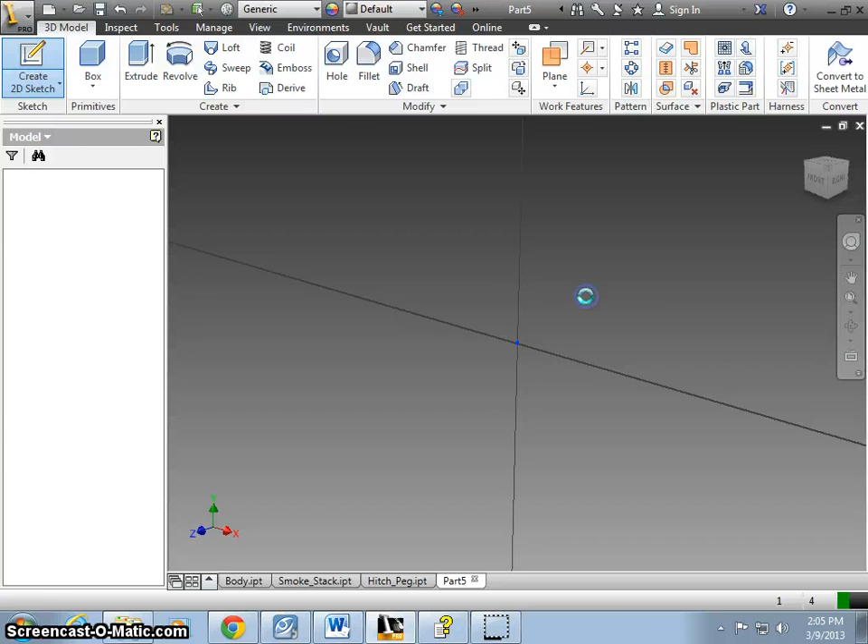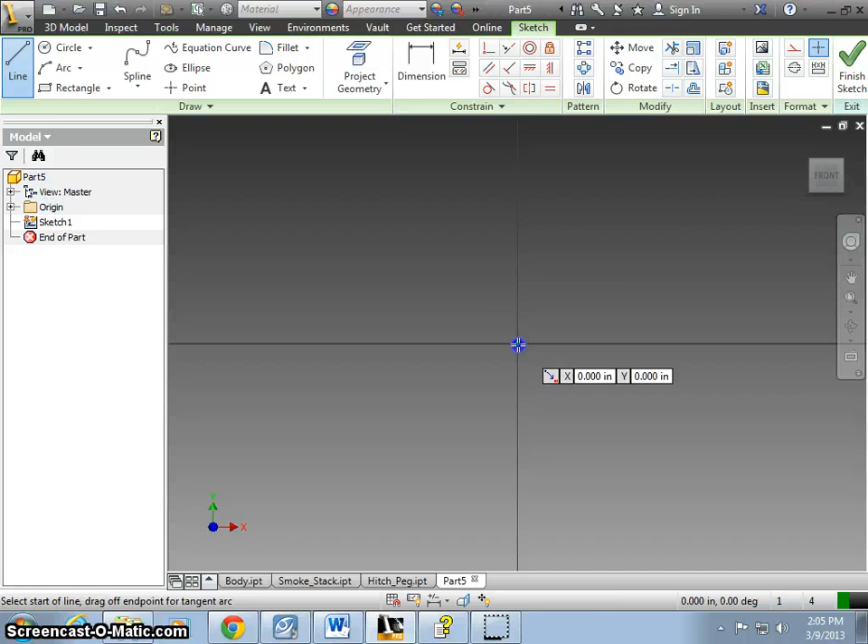So again, I'm just going to create a new sketch and sketch that out here. Now before I start, what I want to mention is notice how there's that hole in here, and same thing, you can either draw this as a full part and then drill the hole later, or just draw it in there right now. So what I'm going to do is draw it in there right now, and this center line that I'll be drawing is just going to be the axis, so I have something to revolve around.

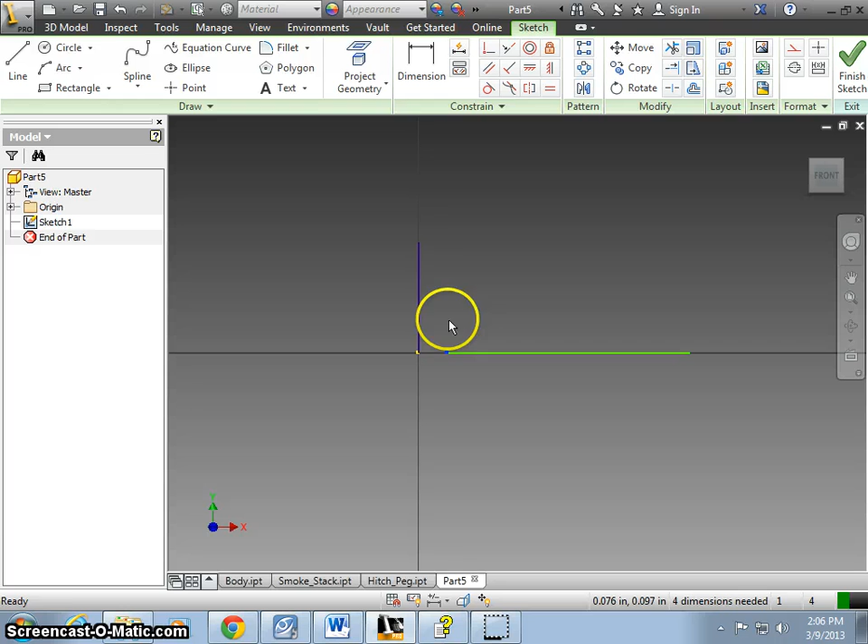Okay, so I'm just going to place that there. That's going to be the very center of my axle hole, and from here I can just go ahead and start sketching that out. If you notice that I just drew this bottom line here, I'm going to wait to draw the arc for that round over, and then for these parts here I'm just going to draw them with 90 degrees and worry about the fillets later. Okay, so here all I'm doing is going up, line, give the thickness, get the overall shape, and then I can worry about dimensioning it.

Okay, so I know from the center of my wheel to the end point, or the center mark of that radius, is 1 inch. So I'm going to dimension from, again, the center line to the axis to the end point of that line that I drew. That's 1 inch. Okay, that scales everything up, gives me the thickness of 1/4 of an inch. So I'm going to dimension that as well. 0.25. And if this ends up happening where it actually bumps that down, you can either leave it.

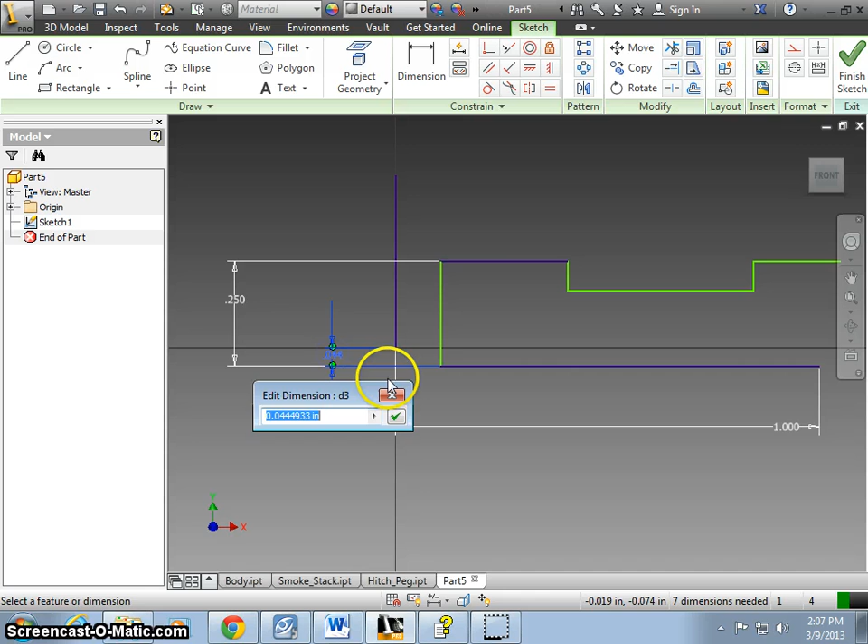I'm actually going to adjust that just because it's a pet peeve. So I dimension from the end point of my origin to the end point of this line. I'm just going to change that to 0. Okay, so that locks in that line there. Again, adjusting the thickness, 1/4 of an inch. And the thickness of this thin section right here is 1/8 inch, or 0.125.

Okay. Here I can start dimensioning where those line changes take place, or lengthwise. Okay, so I have 1/4 inch and 3/4 of an inch. So again, that's based off the center line. So from the center line here, it's 1/4 of an inch. From the center line to that next, I guess, step up was 0.75. So I'm going to dimension that there.

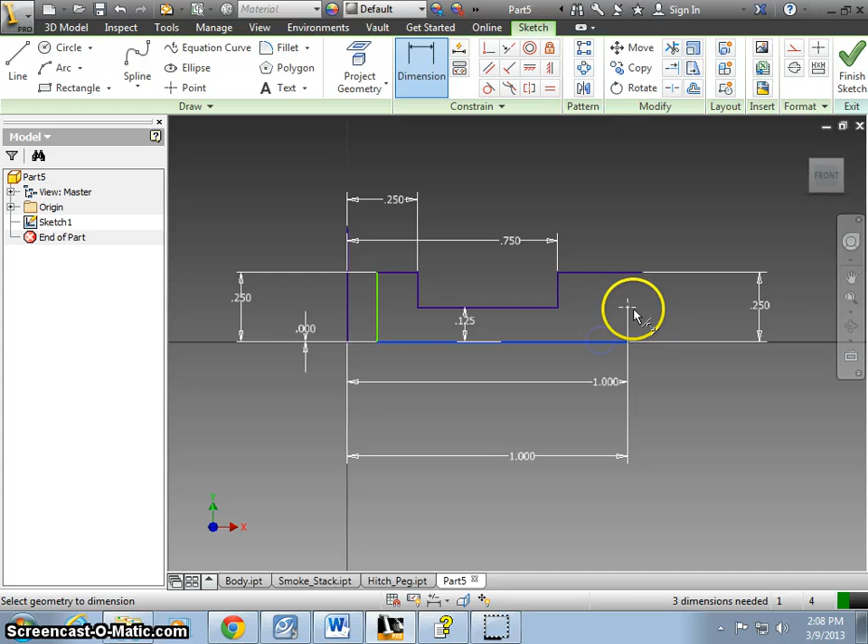Here what I can do is place a point, and it's going to be this line, because we've dimensioned off of the end point of this line here, and you can see that it doesn't necessarily say it, but it shows that it's centered. Okay, so it's centered, it's on the same plane as this line right here. So I can bring my point across and find that end point and go there. And then just to double check, I'm going to dimension from, again, making sure this is the axis line. From the axis line to here, that's 1 inch. And from the bottom of my wheel up is going to be 1/8 of an inch.

Okay, it already says that it's constrained, so you can either at this point hit accept or cancel. I'm just going to hit accept just so I can make sure that that's there, and I can bring this point back and I'll extend it later. Or actually, I can just do this. I'm just going to go from the center line to this end point. That's going to be 1 inch as well.

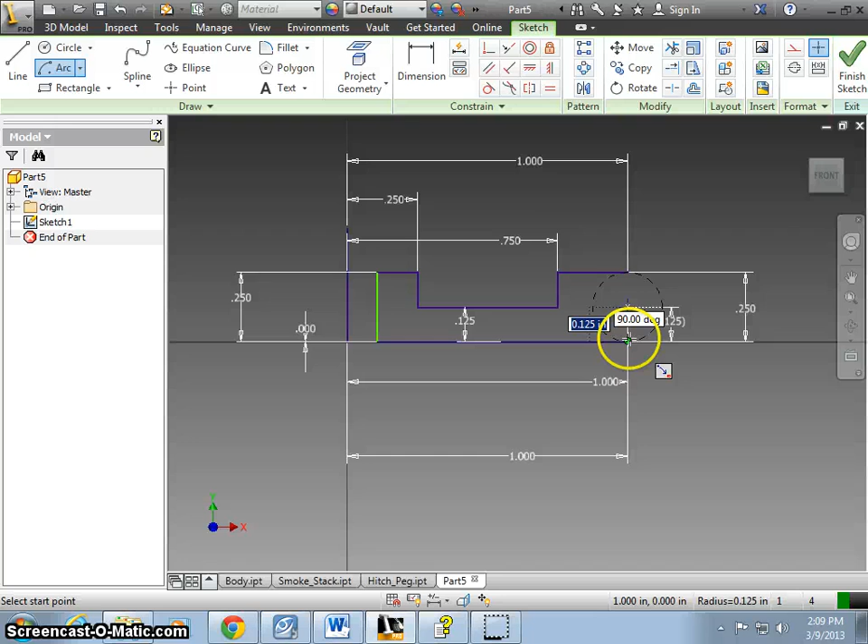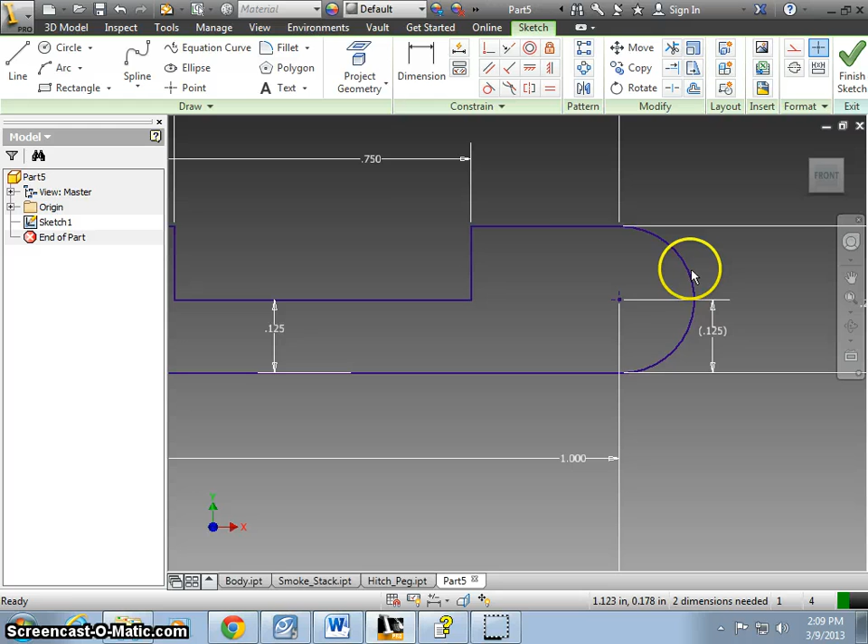And from here, again, using my arc with the center point, I take my center point there. So now I'm based off of here, and I have from my end point, draw it up from the bottom of that end line. Oops. Why isn't that letting me do it? Here, I'll just try a 3-point arc then. Here, I want that end point, and I can dimension the radius as 1/8 inch. Hit accept. Okay, or just make sure that they're tangent. So again, the radius is 1/8 of an inch. That's all that we can do for this line.

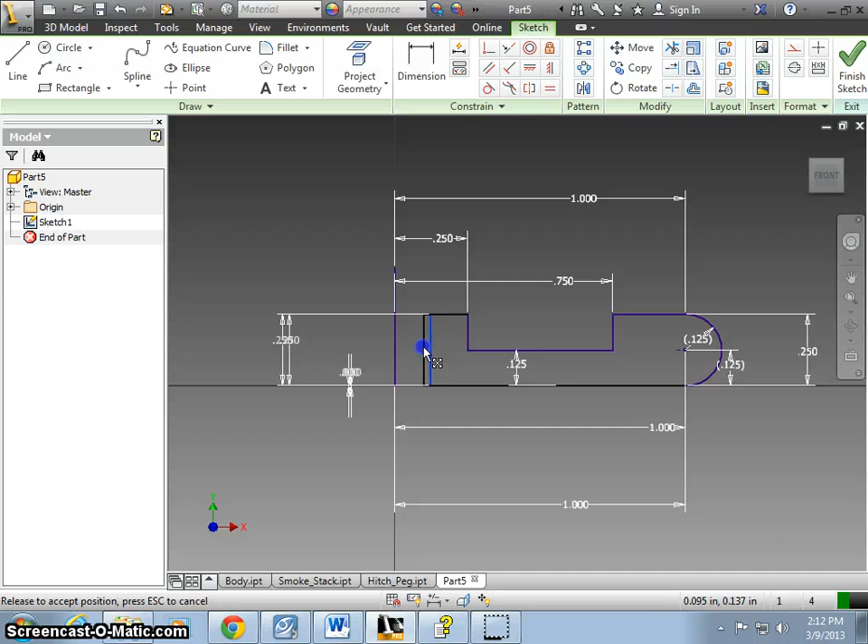Oh, no, it's not. We have to dimension here because you see that still says 2 dimensions are missing, and if I grab this green line, I can actually move this back and forth. So what that's dealing with is the diameter of this hole. Okay, and a lot of people, what they'll do, okay, so what I was saying is that if I grab this endpoint, or this line right here, I can still move it, so I could adjust my diameter. Okay, so I need to actually dimension that point, and if I look back on my Word document, I can find the actual diameter.

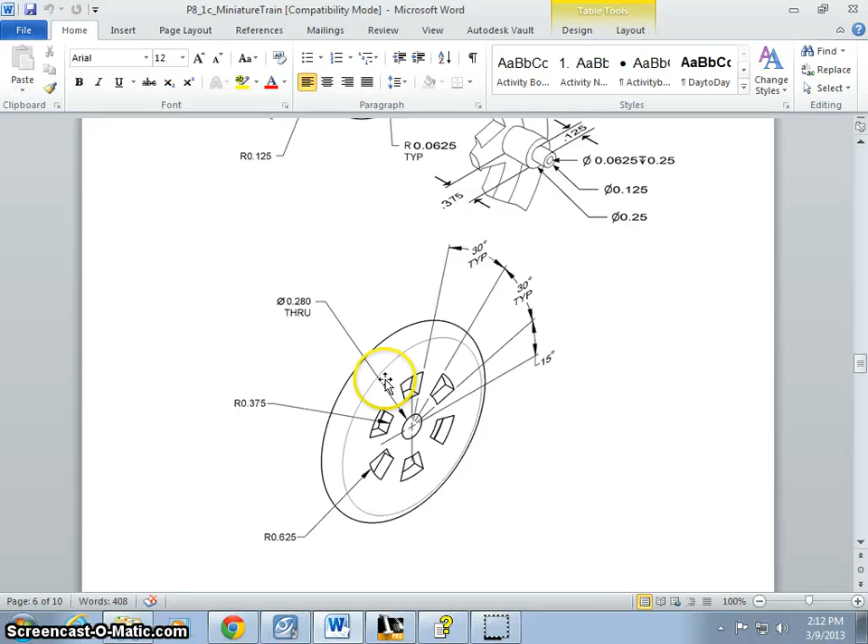So again, this is giving me this 1/4 of an inch. Okay, that's from my axis line to this first line change here, where it drops down. And if you notice, you scroll down, there's a couple different views here of the wheel, and it says that the diameter is 0.28, and that's a through hole. Okay, so I can again have my diameter right there, so I can either cut that in half, which is 0.14, or treat it like a math problem, go 0.28 divided by 2.

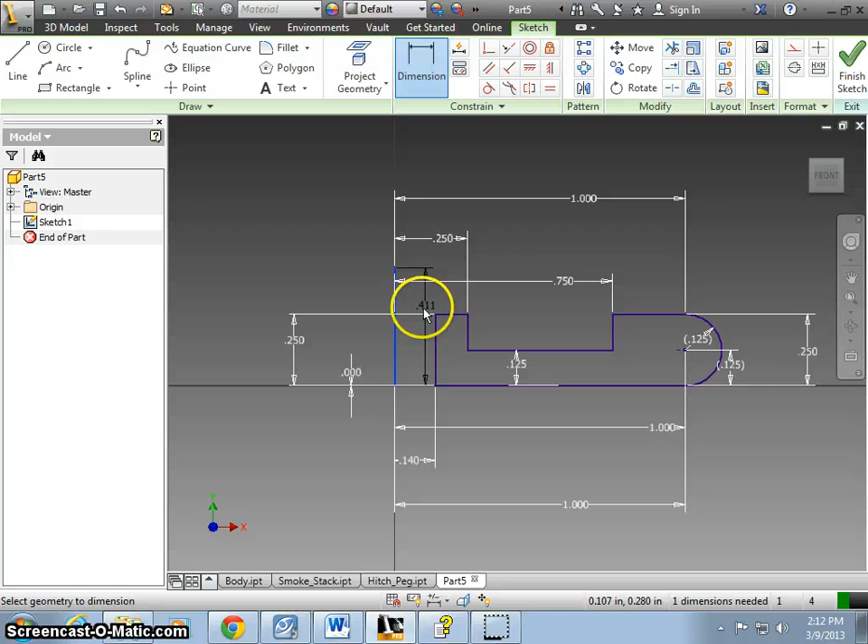Okay, so now I have, it says again this one dimension is needed, and that's based off of my axis line, which is just there for construction. Okay, so you don't need that to dimension that if you don't want to. Finish your sketch and then revolve it.

So you selected your profile. It's looking for what axis you want to revolve it around, and that's going to be that one right there. Okay, so now I have my wheel. Now the next step that I want to deal with is these fillets.

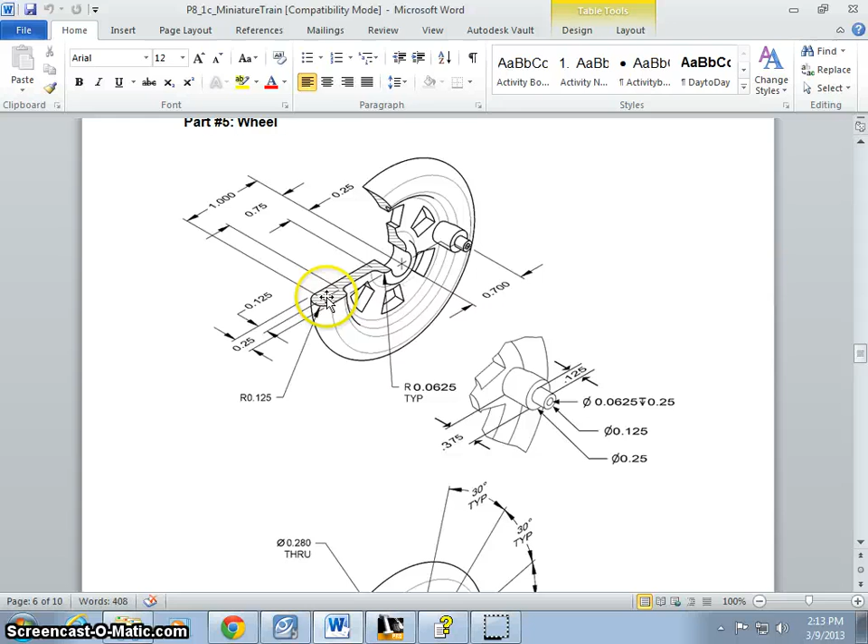Okay, so I'm going to want to get these 4 corners, soften those out, make it a little bit more realistic, and you can see that it says 0.0625 and the TYP, so that stands for typical, so that means all these roundovers here are 0.0625.

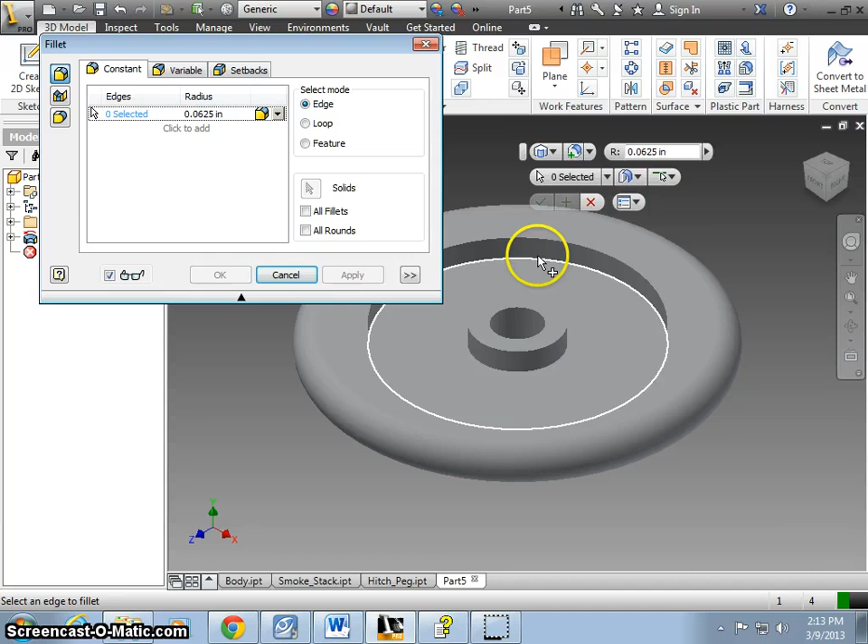So I'm going to use my fillet tool, change the radius, 0.0625, and right now it said that there's 0 edges selected, so I have to click on that pencil and tell it what edges I want to select. So notice how I can select those inside curves and the outside curves as well. I'm going to hit OK, because that's all I have to do from there.

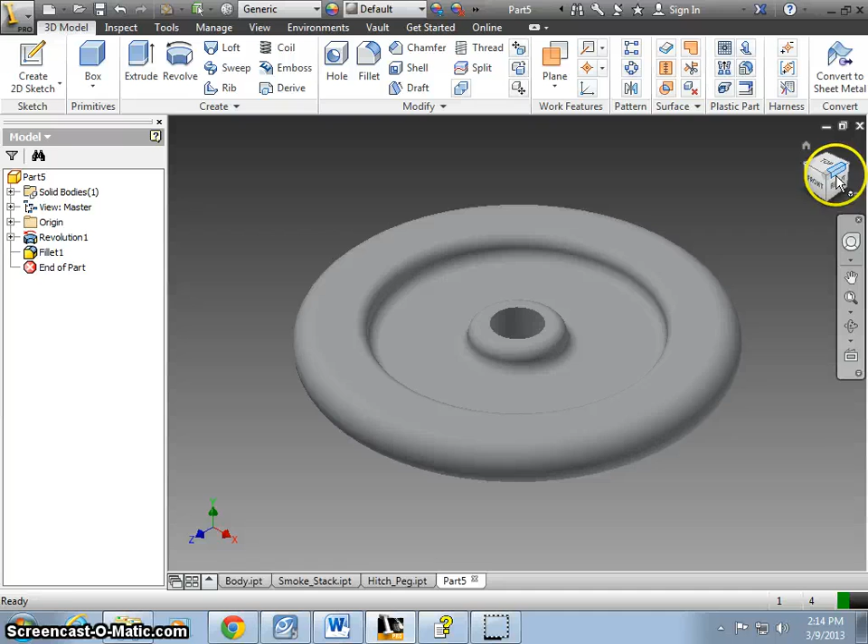Alright, next step that we'll do is actually the backside cutting these holes in there. Okay, so it makes it a little bit easier for doing basing that peg where the actual linkage arm is going to hook up to that. So what I want to do is on the back side, just because it's easier, so zoom to your back side, place a 2D sketch on there, and from here I can go ahead and draw on this one.

Now a lot of people think that, again, that you have to draw all 6 of them, but we're just going to draw the one and then array it around in a pattern so that we only have to draw it once and they'll all turn out the same. So all I'm going to do here is I'll just start by drawing a line. So mine's based off of the center point.

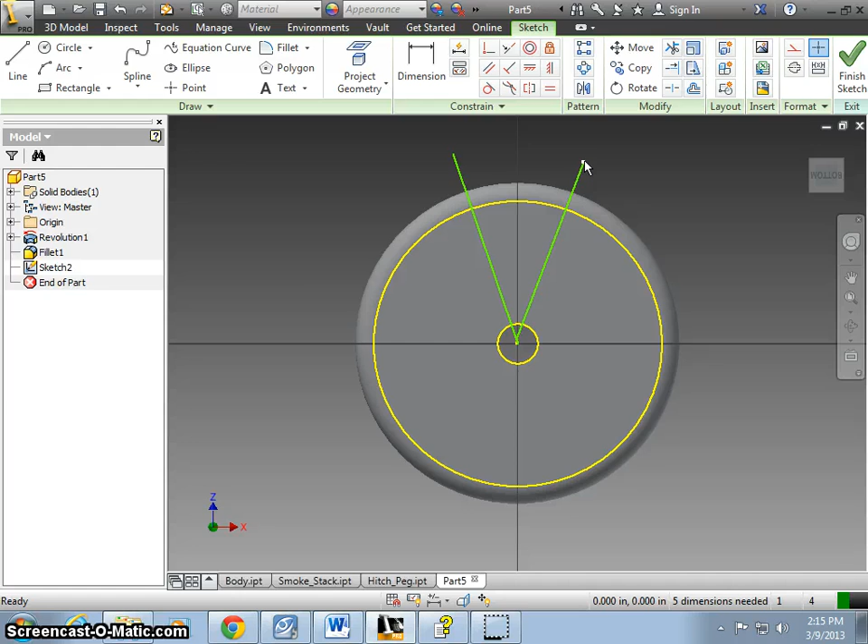So that's right there, and you can notice right here. So if I'm looking at this one, it says that it's 30 degrees from those 2 lines that I just drew. So like these dimension lines, if you imagine that they are these green construction lines that I just drew right here, you can dimension between those 30 degrees.

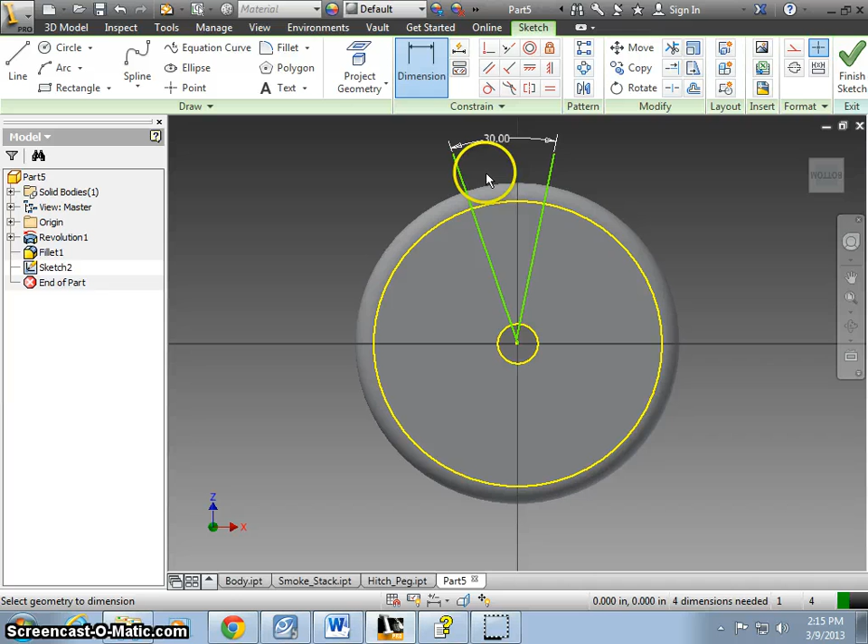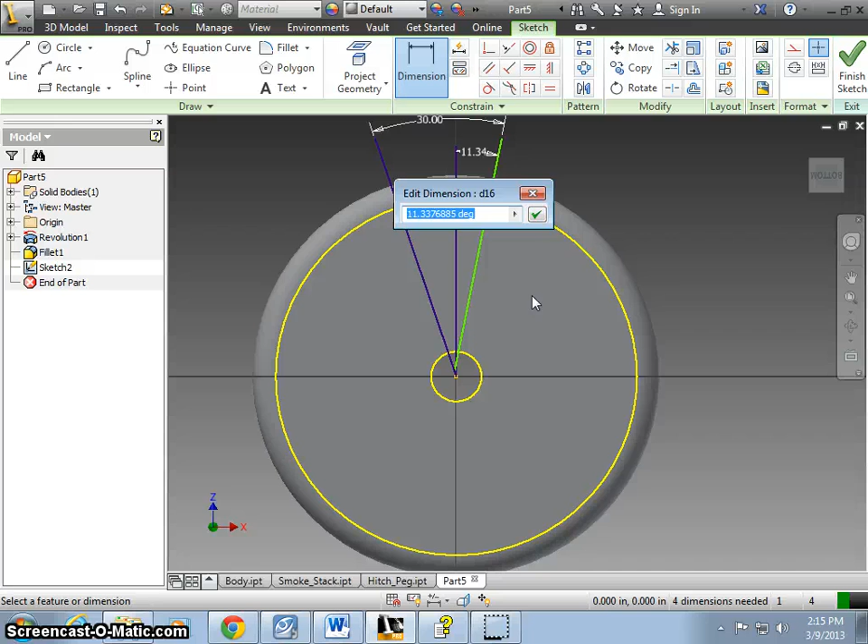Okay, and if you notice, it's kind of cockeyed, it's not centered, so I'm just going to draw another one up. Okay, and I know that that is, I guess I can say, perfect, or plumb. So your dimension from there to there, half of 30 is 15. So type in the 15 degrees, so that centered it. Again, just helps you kind of overall understanding what dimensions go where and everything.

Alright, now what you'll do is you have your radiuses here. Okay, so these radiuses are just for this endpoint. So I could either do an arc starting with my center point, or I could draw a circle and then trim it up. Okay, so I'm just going to start with an arc starting with the center.

Again, select the center. It's going to be the center point there, and right now it's asking me for the radius. The first radius is 0.375, so I'm just going to go 0.375. Click there and there, right, and I can actually trim that up.

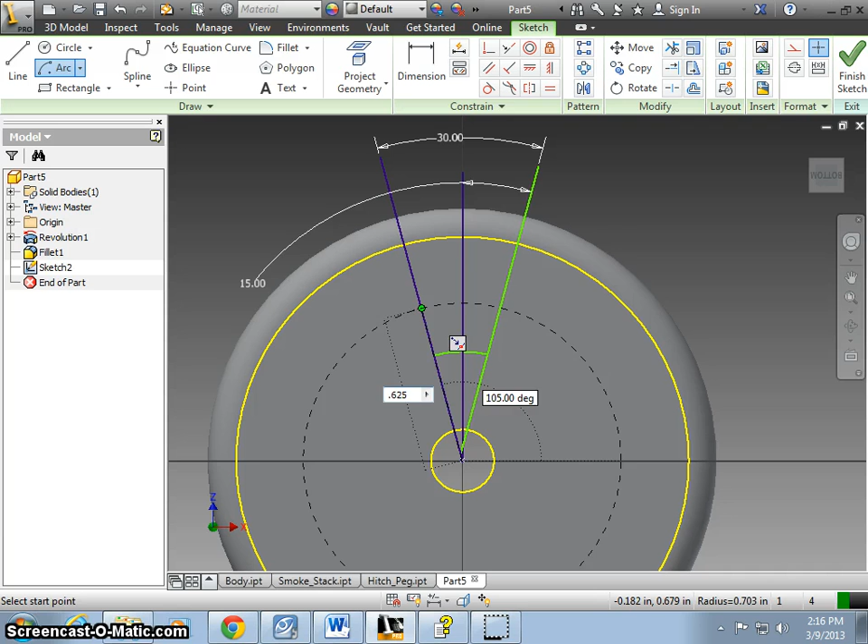Right, next that I want to do is the outside radius, which is 0.625, and again, same thing, center point arc, go up radius 0.625, click there once, there, oops, there you got your arcs drawn. Then you can trim those up. Right there. Then what we'll do is we're going to use our circular pattern or array.

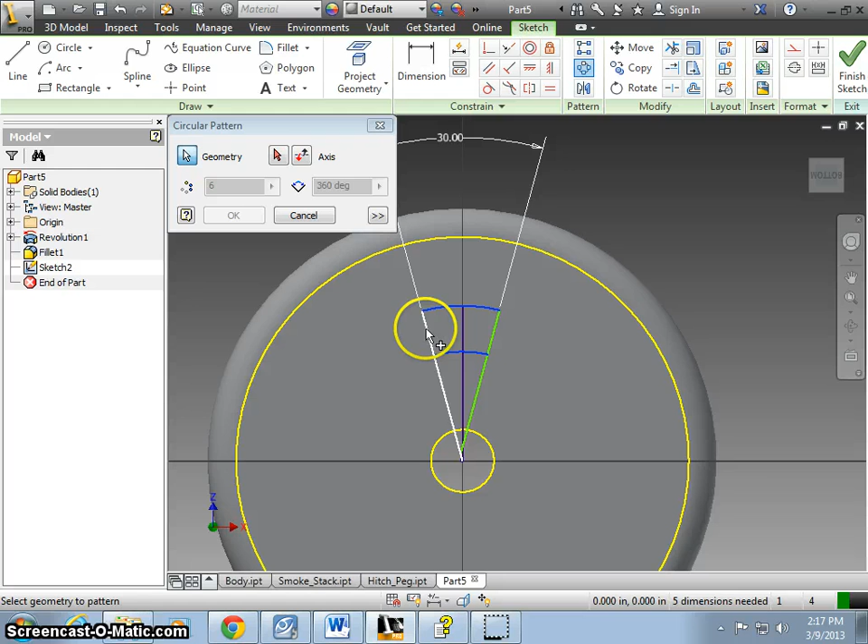That geometry that I want to revolve is going to be this one. Okay, and these side edges here. And I don't feel like doing it 12 times. So I'm going to trim those up. Oops, I actually deleted my lines. Oh, good thing I saw that, because my line didn't begin at my center point.

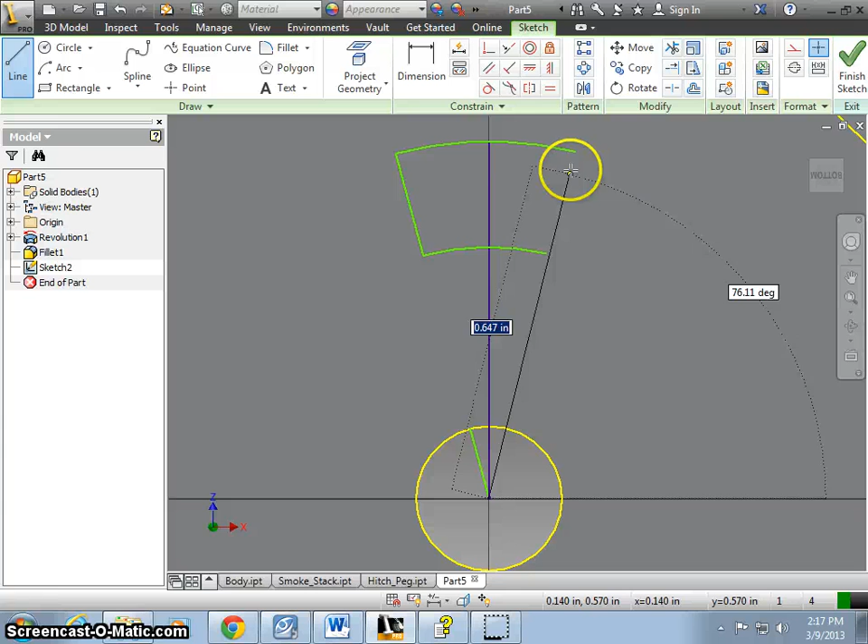Alright, so here I have that, and I'm just going to delete those two lines, dimension again, make sure that I'm at 30, so see I was off a little bit. So I have to go from there, 30, redimension, check again, that's 15, that locks that in.

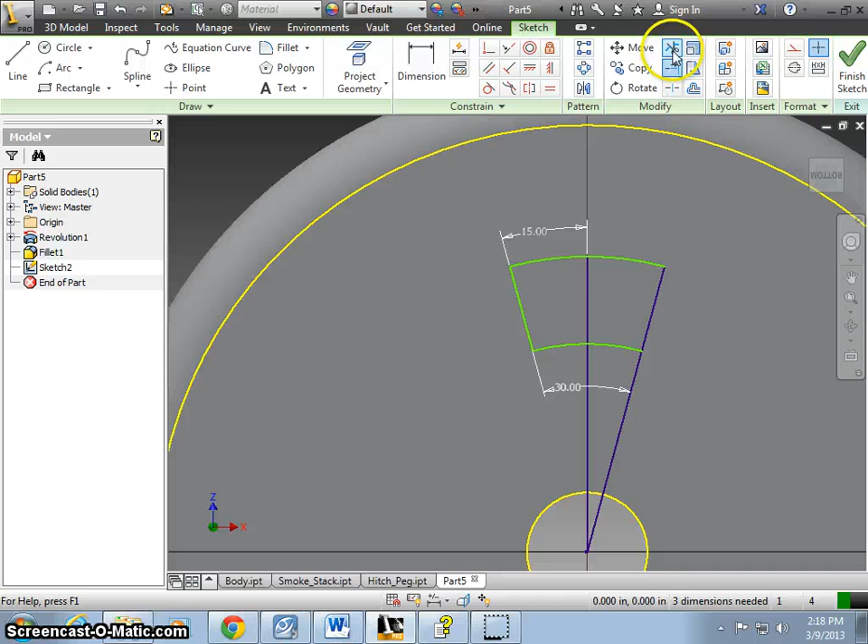You can just extend this here, and I'm going to trim this line there, and trim this line up, and delete this as well, and just go back and dimension that. Okay, so that's 30.

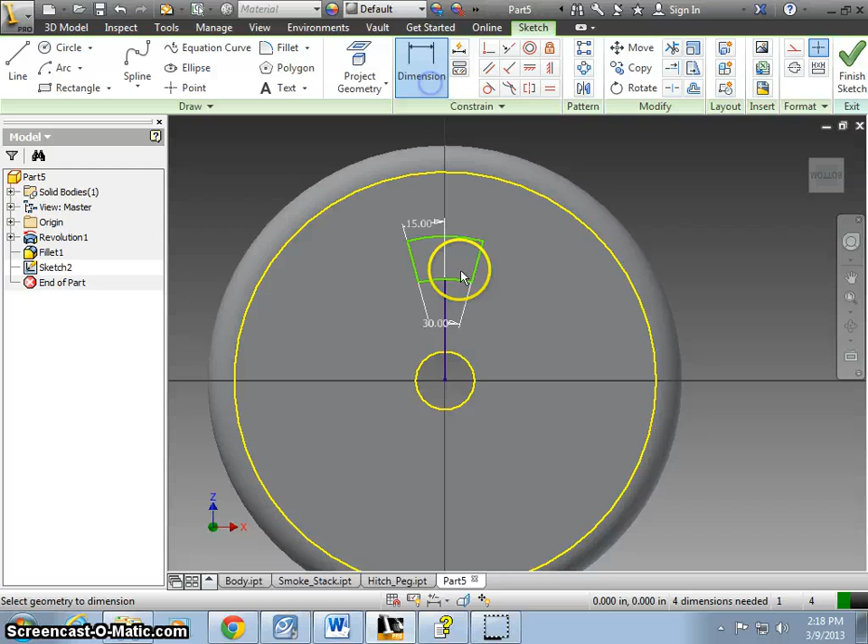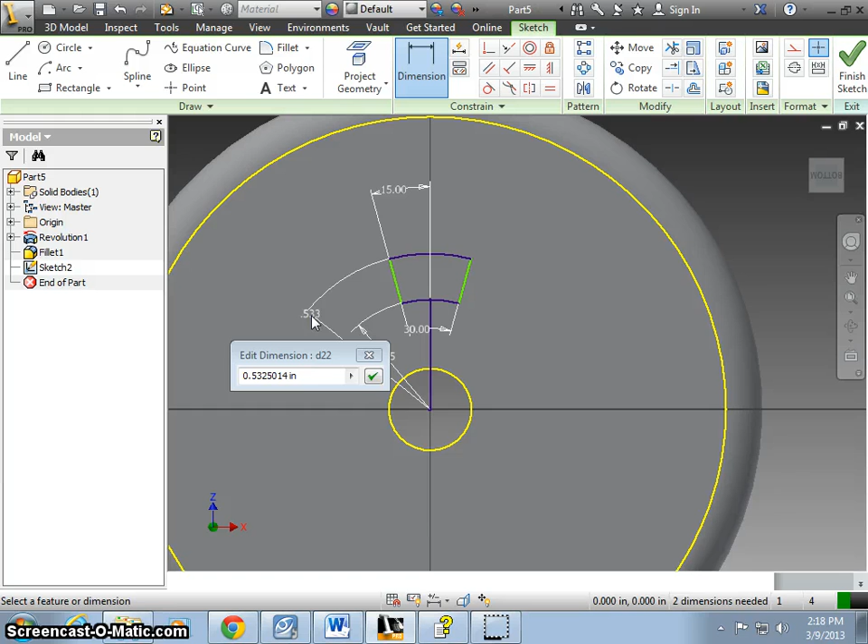And I also need my radiuses thrown in there. Okay, so that kind of messed up, so it's 0.375, brings that back down, and my overall arc itself is 0.625, so that's that one hole that needs to be extruded through.

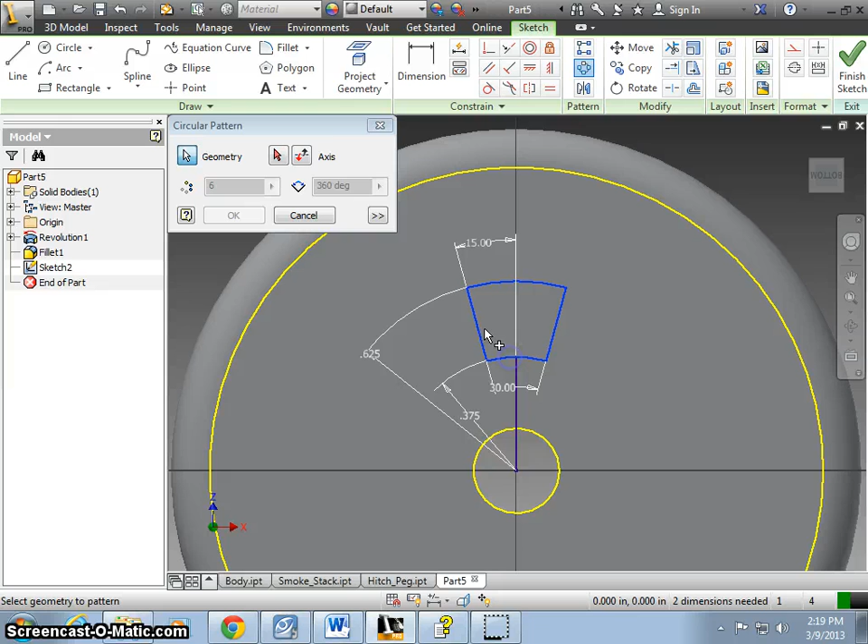Then what I'm going to do is take a circular pattern, now that I finally got it all figured out, and select what geometry I want. So I want all 4 of those pieces, what axis, I want it around that center axis, and it needs to be 6 patterns thrown around 360 degrees. Okay, so that does that. It gives me all the patterns.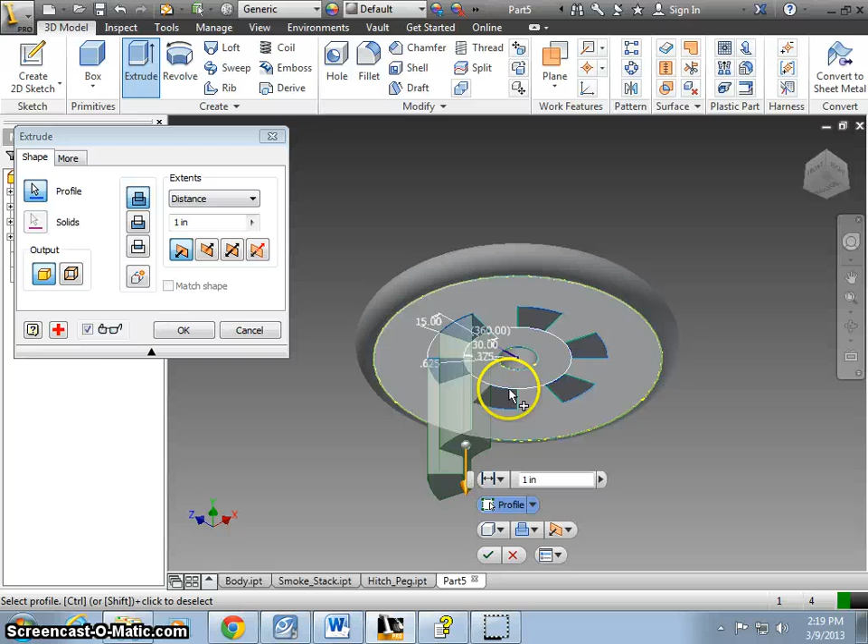From there I can then hit finish 2D sketch, and I'm going to extrude. Okay, and so I'm going to select all these patterns, and again I want to make a cut. So it's going to be a cut, and it's going to be through all.

Okay, we're almost running out of time, so what I'm going to do is I'm going to save it here, and then we'll do part 2 to get the actual linkage arm. Okay, so where the linkage arm attaches to that.